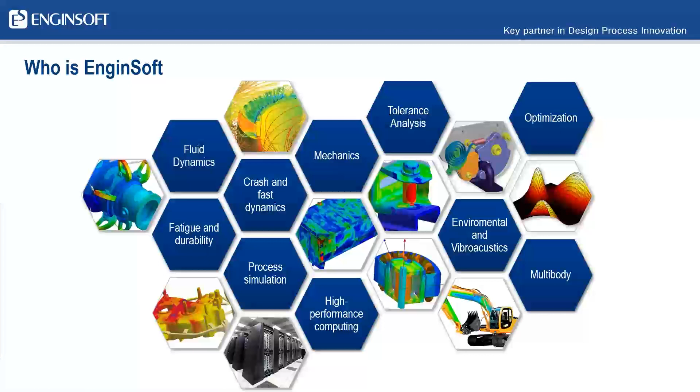Right, so this is a high-level overview of the different core competencies that we have. So you can see probably something that you're interested in. We spend a lot of time on fluid dynamics that we're not going to really be talking about today. So we will be talking optimization, multi-body dynamics, HPC, that sort of stuff all wraps into the multi-body realm.

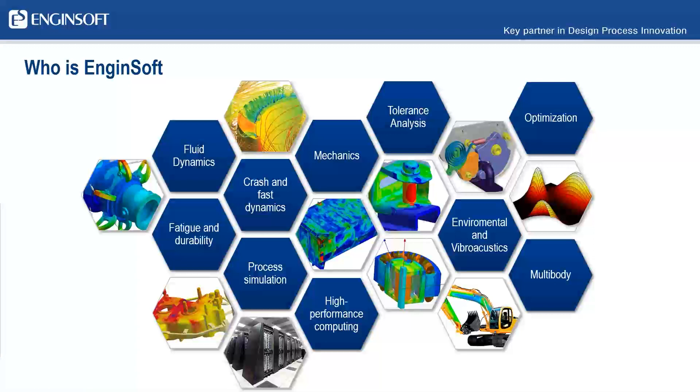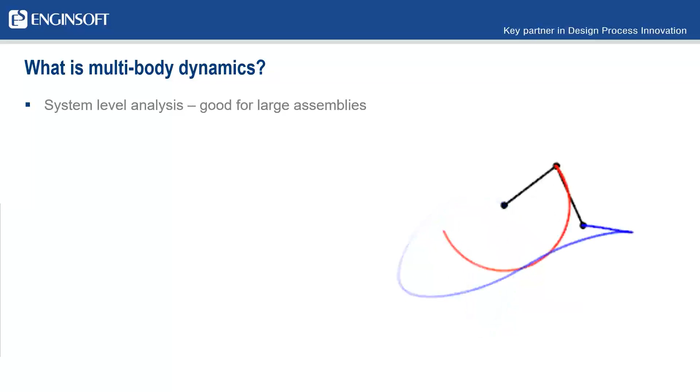All right, so starting off with what is multi-body at a very high level, and it's a system level analysis tool. You'll hear me refer to it as MBD, and I apologize. I know that has a different context in the CAD world versus the CAE world. But for the CAE world, that means multi-body dynamics, which I said is system level, and I'll go into each of these in more detail.

But it's really comprised of three main things: kinematics, contacts, and multi-physics integrations. So that's what really lets you do the system level analysis, by coupling this kinematics and contact solver with a CFD solver or an FEA solver or a control system, for example.

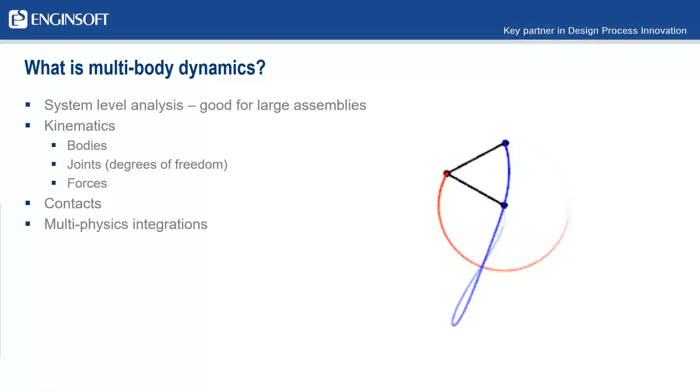All right, so what is the kinematics portion of this? This is the simplest part, and it's the part that is hard to screw up. Every multi-body tool that you'll ever encounter will do rigid bodies pretty well. This is really the Dynamics 1 type of stuff, where you have some simple object and then another object rotating about the center of another one. So it's a lot of coordinate system transformations, but at the end of the day, it's pretty simple math. It's just very tedious and a lot of that simple math.

But the key thing with rigid bodies is that you're not discretizing the object like you would for FEA. So you can reduce every body in a system to just a local coordinate system. And then you connect those coordinate systems with joints. That's what this really simple example is. We have a bunch of linkages, and we're connecting them at these circles here.

So we're connecting to ground with a revolute joint, which gives us 1 degree of freedom in rotation. We have the same thing on this side, and then we have a spherical joint over here. So that means all of our translational degrees of freedom between these two objects are fixed, but it can rotate about any degree of freedom. All of the rotational degrees of freedom are open.

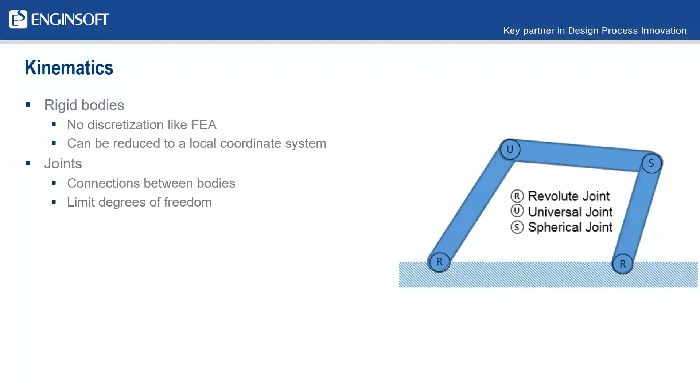And then we have a U-joint or universal joint for this one, so that's a slightly more complicated set of degrees of freedom, but same basic idea. You've got points connecting two objects and some number of degrees of freedom. And then also forces are going to be found in every MBD tool. So that can either be a linear force or some radial force or a torque, or simple springs would be handled here as well.

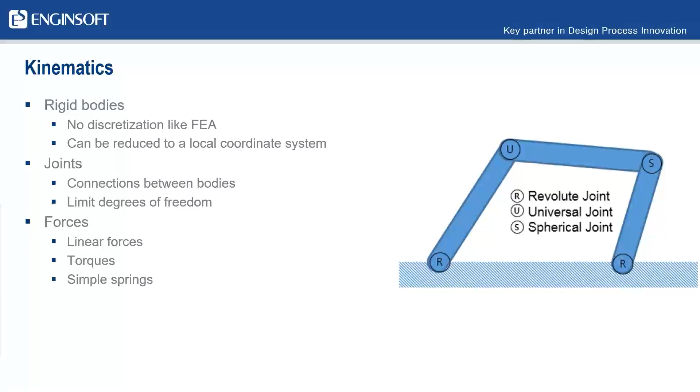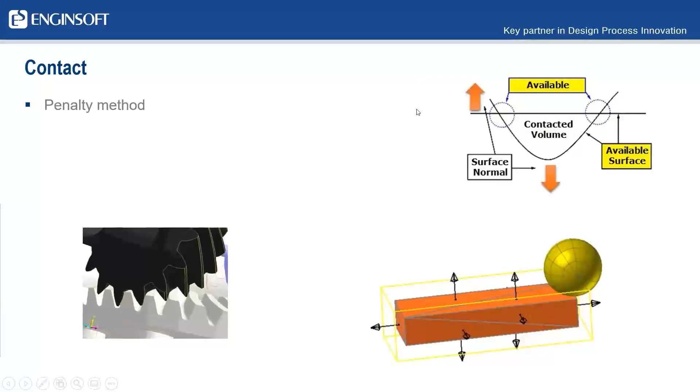All right, now jumping into some of the more complex stuff, the contact. Before I go into these examples, I want to do just a brief intro into how these solvers are handling contact. And we use what's called a penalty method. What that means is, let's say we have two objects, so we're zoomed way in here. The solver is going to have some search algorithm to figure out when two parts are overlapping. And then it essentially inserts a virtual spring between these two objects to resist that overlapping.

And because it's a spring in reality, the repulsive forces are going to be proportional to how much of an overlap there is. So you can see a more complex example here, and then a more simplified example here. In this case, we're seeing the discretization that the solver is using to evaluate contact.

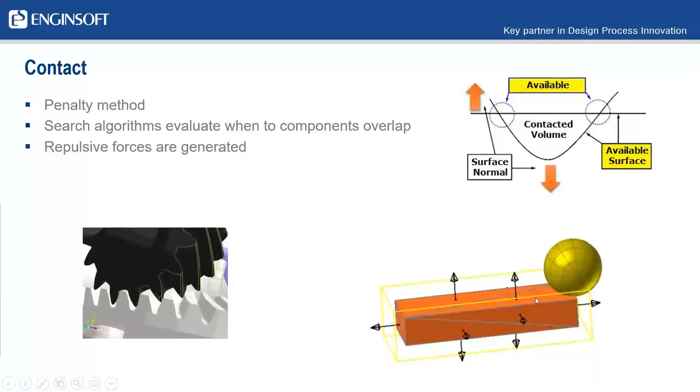So for a sphere, it's actually super simple because you just care about what the center of that sphere is and what the radius is, and from that you can figure out if it has a point intersecting with this other object. But this one, the box here, has to be discretized to some extent. The solver is going to handle this a little bit differently, but in this case, we can see that it's been tessellated and it's using these facets to evaluate contact.

Now that we've sort of gone over some of the basic components that go into a multi-body solver, I'll go into when you would want to use a dedicated tool versus something that's embedded like Creo Mechanism, because they each have their own use cases. And I'll go through each of these in more detail, but it's basically contact-driven problems, flexible components, and the multi-physics problems. That goes back to the integrations that I spoke about earlier. And then lastly, automation.

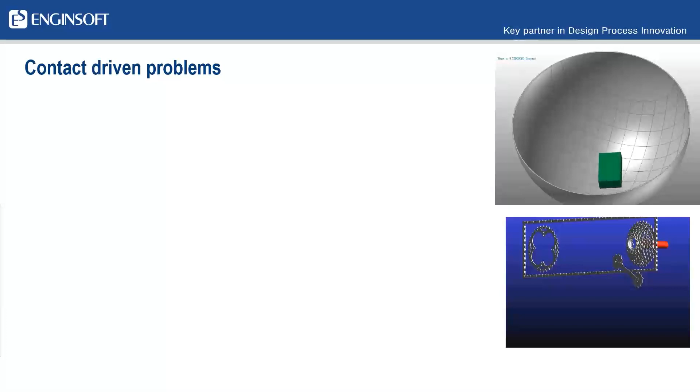So for contact-driven problems, kind of self-explanatory, but this is really what separates a kinematic solver from a true MBD tool. For a dedicated tool, that's kind of their selling point, so you'll find much faster contact algorithms in the dedicated tools. As an example, this is a super simple problem that I set up, and it solves in 10 seconds to do 5 seconds of simulated time. So for simulation, that's almost real time, right?

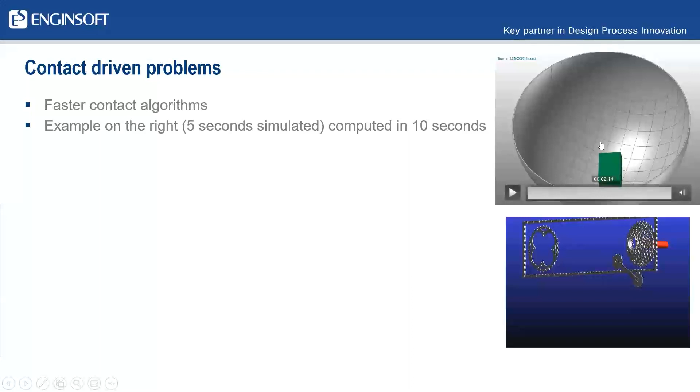And this is actually a deceptively complex problem. When you have a box like this, it's very easy for the solver to see one singular point penetrating the bowl that it's in, and generate far too high of a repulsive force. So for tools where contact isn't their strong suit, you'll generally see the box explode out of this example. Anytime I'm testing a new solver, this is the sort of thing that I do just to get a feel for how stable it is.

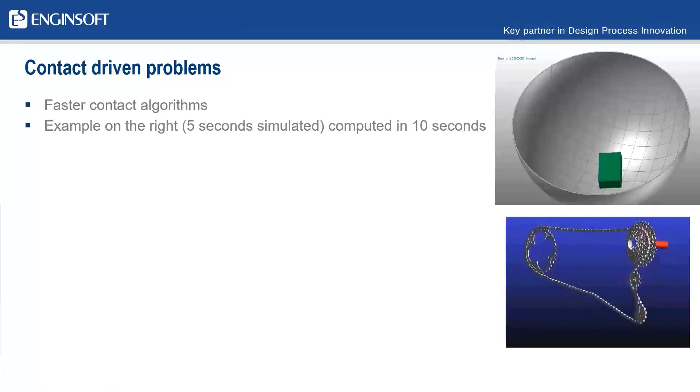And for a more realistic example, I found this bike chain. The actual simulation is looking at switching gears for a bike chain drive. But if you think about what the solver has to do here, it has to evaluate contact between every single one of these links and each of these sprockets here. So that quickly becomes hundreds of contacts to evaluate. And if it's not efficient at doing that, it's going to sort of choke and not make any progress.

And the other thing you'll see is a lot more customization with how you can define contact in a dedicated tool versus a CAD embedded tool. So the CAD embedded might have half a dozen contact types that you can define, whereas a dedicated tool, this is just a subset of the analytical and semi-analytical methods. These are more efficient because you can reduce the problem set a little bit.

Best example here is sphere-to-sphere contact. If you can simplify your problem to being just 2 spheres, then you just have to evaluate the distance between the center of those spheres to know if there's contact, instead of doing a full tessellation of the object.

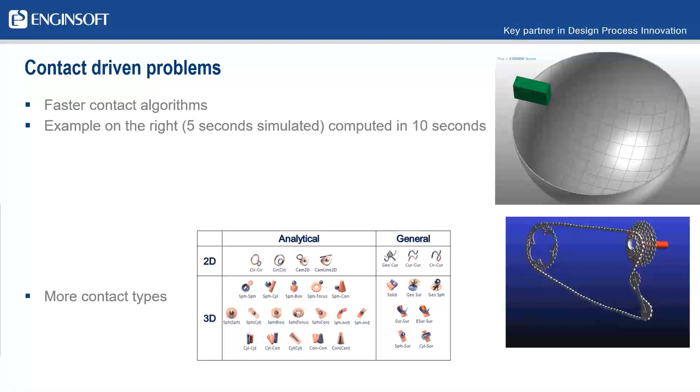And then next, flexible components. This is most commonly handled by coupling with a separate solver. In the case of Recurdyn in particular, it's all handled by one solver. There's a couple of different ways flexibility is handled. The first being linear flexibility. You might see this described as the Craig-Bampton approach. In Recurdyn, we call it RFlex, but this is the general name of that method.

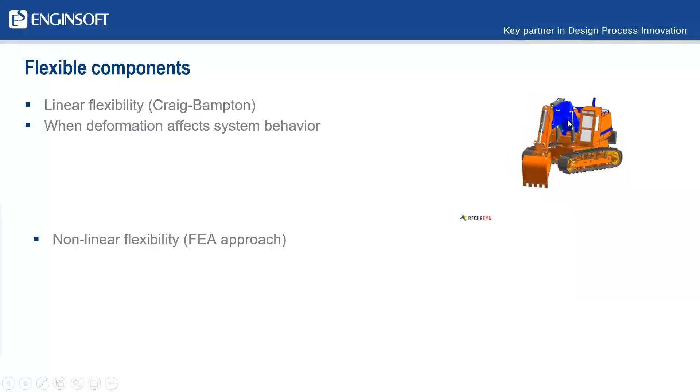And without going into detail, basically, it's a linear approximation of this object. So it's quicker to solve, but you can't handle nonlinear problems. You can't do contact between RFlex bodies or Craig-Bampton bodies. But for something like this, where you just need some small amount of flex, that can be a suitable approach.

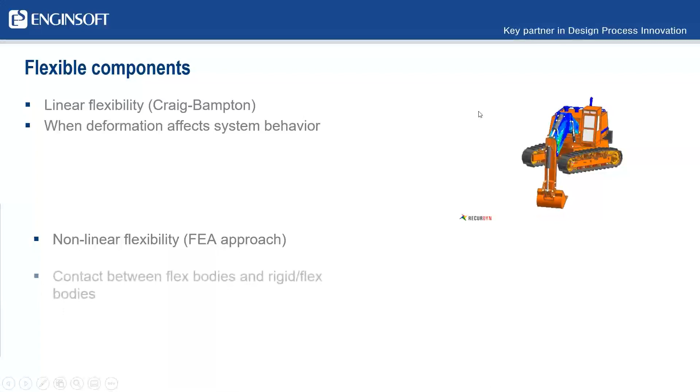And then similarly, you'll see differences in the way that you can interact flexible bodies with other flexible bodies or rigid bodies, depending on the solver and depending on its capabilities.

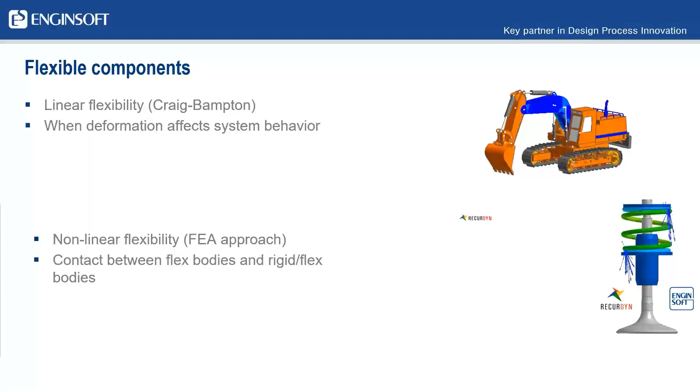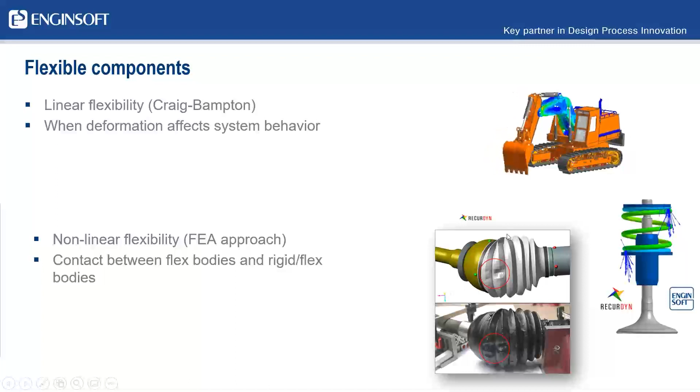Next, I'll talk about the multi-physics integrations. So something like Creo mechanism, it's really not designed to handle this type of problem, right? But as you move on to the dedicated solvers, you'll generally have a ton of built-in integrations where you can sort of just click a button and it takes care of everything behind the scenes to do a co-simulation between the two solvers. And the most common things that we see people using that for are

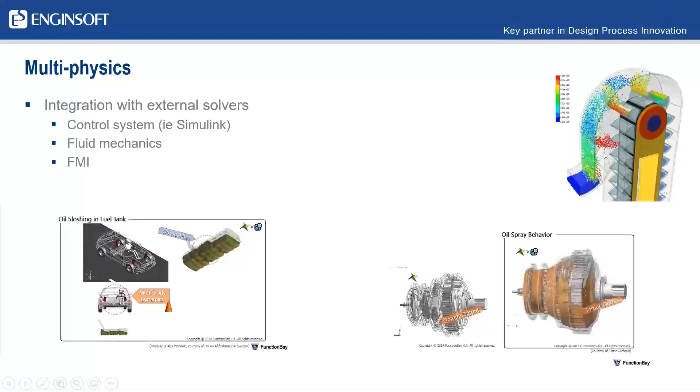a fluid simulation. In this case, we have a coupling with ParticleWorks, a particle-based CFD solver. So if you wanted to look at churning losses in this gearbox, for example. Or material handling problems are pretty common as well, coupling with DEM solvers. You could evaluate, for example, how much force does it take to move this assembly here.

And lastly, this one combines a couple of different things, including a control system. So we can either do it using the built-in control system tools, or coupling with Simulink is probably the most common thing that people are using.

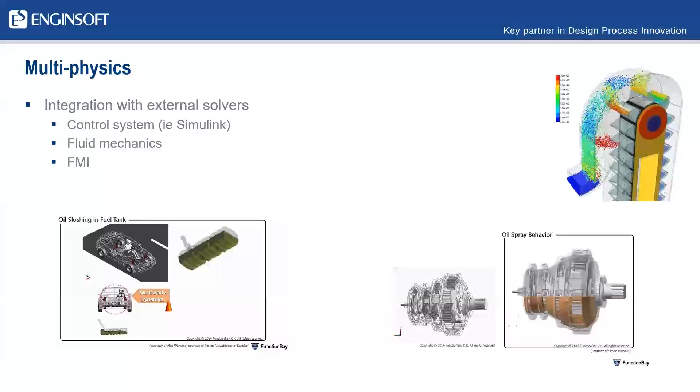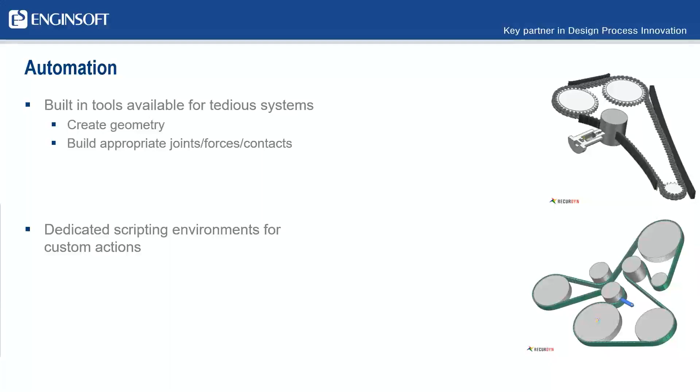And the other thing, and this varies based on the use case, but the dedicated solvers will typically have scriptability baked in. So some way of either automating a process or adding functionality to the solver, maybe custom contact definitions, anything that you want to do, these tools are generally built to allow you to do it.

All right, so I've talked up why you would want to use a dedicated solver, but there's always cons to every pro, right? So when you switch from the embedded tool in your CAD system, obviously Creo for everybody here, and then go to a dedicated tool, there's challenges associated with that.

The first being geometry. That's kind of a catch-all for all of the tedium involved with moving data from one tool to another. So you pretty much are always going to have to do some amount of CAD cleanup, whether that's removing all of the bolts in your assembly or simplifying some surface for better contact performance. Whatever the case is, you have to do some amount of cleanup.

And you lose metadata. Metadata, again, being sort of a catch-all for stuff that you wish would go from one tool to another, but doesn't. A good example for this would be if you had joints defined in your Creo mechanism model and wanted to step up to a dedicated tool for some reason. You're generally going to lose all that information. You'll just get the geometry to come over.

And revision control is difficult. So this is sort of at the enterprise level. You're losing the parametric relationship between your simulation model and your CAD. So figuring out when changes have been made to your CAD model and then applying them to your simulation model is sort of a whole task on its own, especially when multiple people are working on the same project.

If I jump into this video, I just want to check the chats.

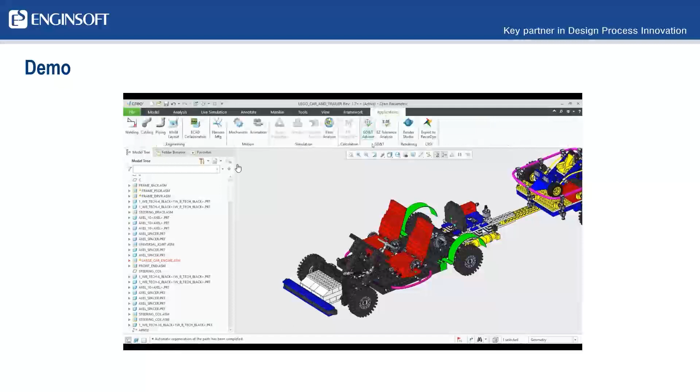So this is actually a really fun example that I found on the PTC site. It's a Lego car and trailer assembly. So this is just kind of a fun example to use. But there are, I think, over 1,000 parts or over 1,500 parts in this assembly. So it's not trivial by any stretch.

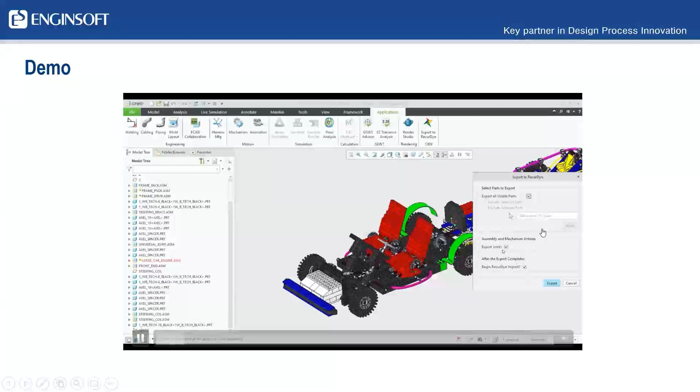You can see I've switched over to this Applications tab where we have only one button in the interface. So you can't click the wrong one. And then it pops up this dialog. Okay, so there's 752 parts in this assembly. Let me let this play. So there's a couple of different options. By default, it'll just export everything that is visible in your Creo assembly. You have the option to specifically make an include or an exclude list.

But the nice thing about only exporting visible objects is you can use simplified reps. So let's say you have a simulation simplified rep, excludes or hides all of your nuts and bolts and stuff like that. Then you're basically able to reuse that without any additional work. You just apply that and export the visible stuff. Optionally include or exclude the joints that it finds. Not sure why somebody would uncheck that, but we wanted it to be an option, so you can ignore those if you want. And then by default, it's going to open up RecurDyn as soon as the export finishes.

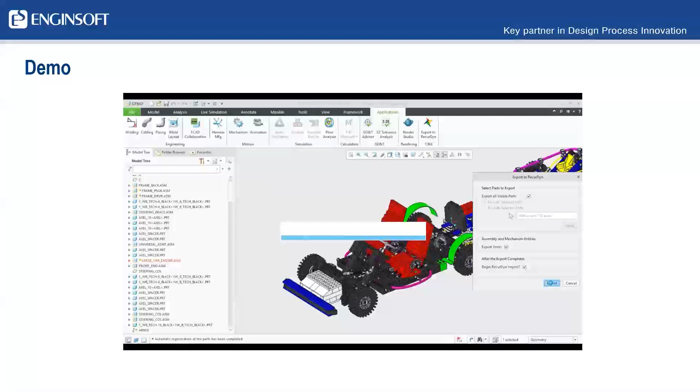So the export is done. It's written out a portable file. And what I mean by that is it's a single standalone file that can be shared externally. So what's happening under the hood is we do a kernel conversion so that RecurDyn is able to open up this file without any external dependencies.

So somebody in the CAD department could perform the export for the simulation user and then send them over a single file, which they are then able to import. That lets you keep separation if you want it. Otherwise, if it's all happening on the same machine, that's obviously going to work. So it's parsing in that file. Okay, here we can see the import dialog. It's giving us a preview of the assembly structure that we're going to get once we actually click the import.

So pretty soon I will right-click on one of the sub-assemblies, which you can see denoted with kind of a darker blue icon. That means it comes in as the simulation equivalent of a sub-assembly. We call them subsystems, but same idea. And what I did here was I right-clicked and said convert it to a body. And what that means is, as far as the MBD solver is concerned, it's reduced down to a single coordinate system. So I can constrain it with just one or a handful of joints versus needing to manually constrain every single thing in that subassembly.

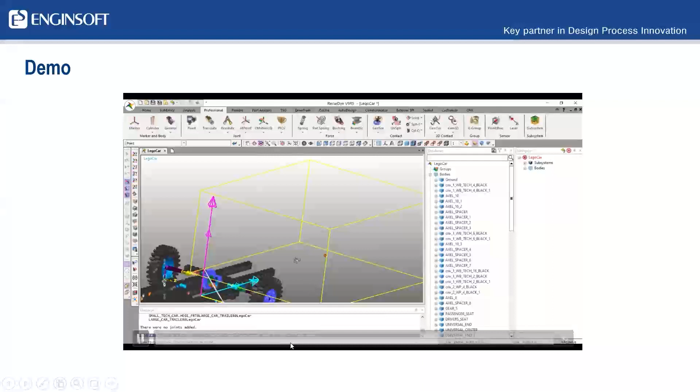Now we can see that it imported everything. I'm going to do some graphic stuff to make it a little easier to see what's going on. You can see this is our assembly structure here. This is showing all of the parts that are at the top level. And then if I scroll down, you would see what we call subsystems. So that's highlighted in this yellow box here.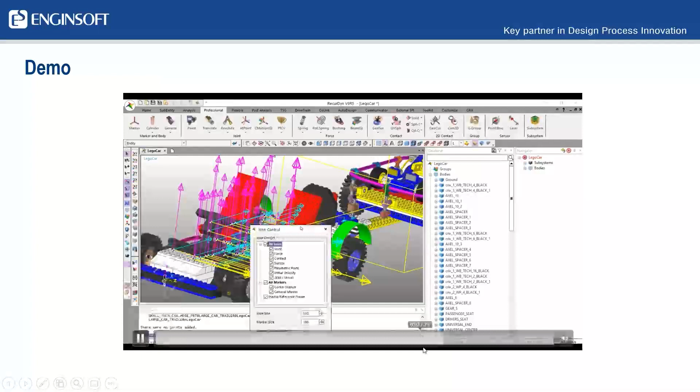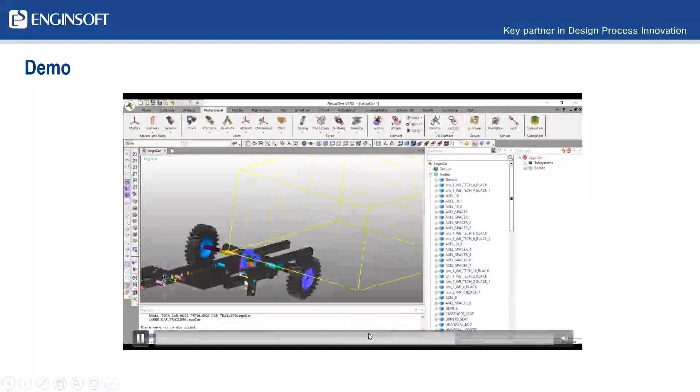Now I'm jumping into this subsystem, and we'll see basically a different assembly structure showing what's contained inside of that subsystem. I deleted the animation on this video, and it keeps doing that. Okay, pause it just to see what's going on here.

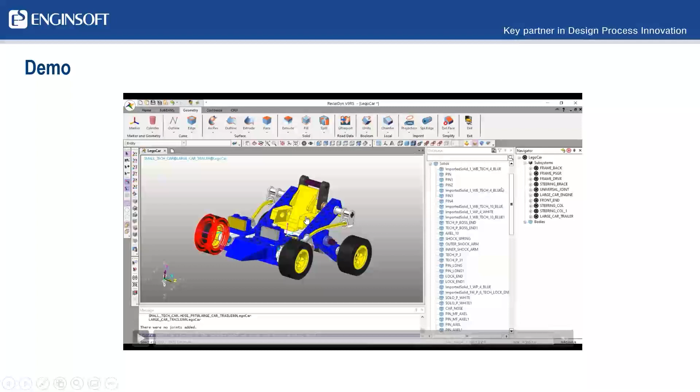So this is one of the components that I merged into one solid, basically. So inside, we still have all of the geometry features, all of the parts that are there. And that means they can be updated the same as any other part. But from a constraining perspective, we can just apply one fixed constraint that would fully define every part inside of this object.

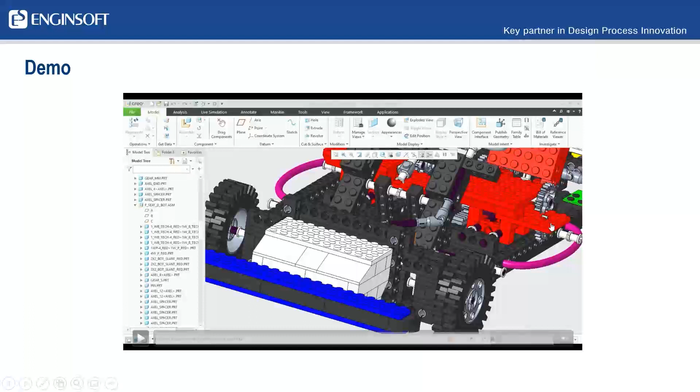All right, so we're going to skip over the actual running an MBD simulation portion. So for sample purposes, we can see that there's one part. We're going to say that's the change we want to apply. This is sticking out too far, so I skip over the actual geometry changes, but basically I just cut this piece here. You can see that that change is applied.

And then let's assume that that change was made by somebody else in the organization. Maybe the simulation person doesn't even know the change was applied. So they could go through change logs and figure out what changed, but you're liable to miss something, right? So by exporting the entire assembly again, it'll do that search for you and figure out any parts that have changed since the last import, really reducing any chance for errors.

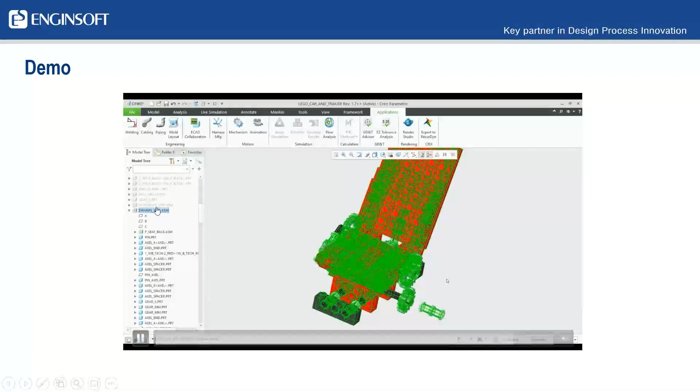In this case, I know which subsystem the change has been applied to. So for the export, to make it go a little bit quicker, I hide everything except this subassembly. And then that's all that's going to be included. That shows that you don't have to export the entire assembly every single time, but it is an option.

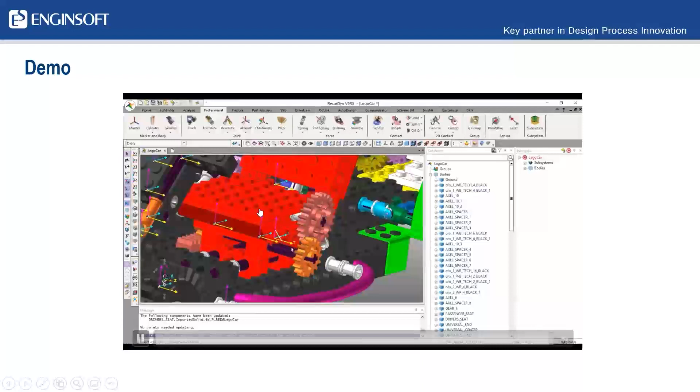Then you can sort of see that that piece is sticking out there, and then it goes through and does the update. We have a couple of options to modify any updates as it's happening. In this case, it's just a click through to get that update to apply. And if I had contacts associated with that body or any joints, those are still going to be there. I won't lose any work.

That's one of the key customer complaints that we received to develop this: updating geometry often leaves you deleting one thing and losing all of the associated contacts. And then you have to add them back in after you add in that part. So it's sort of a pain, and we wanted to automate that entire process.

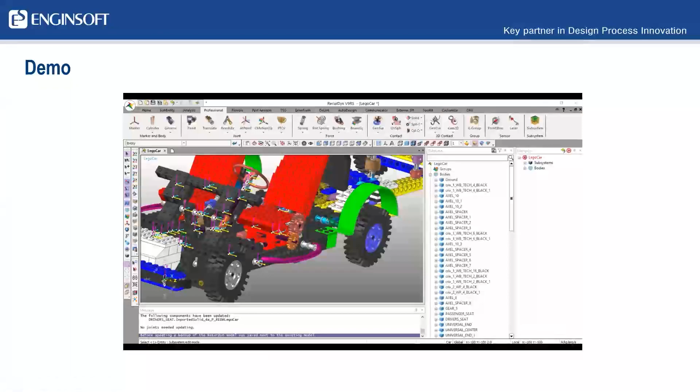So that concludes that presentation. I am happy to take questions either about this interface in particular or multibody in general. Does anyone have any questions? Feel free to unmute.